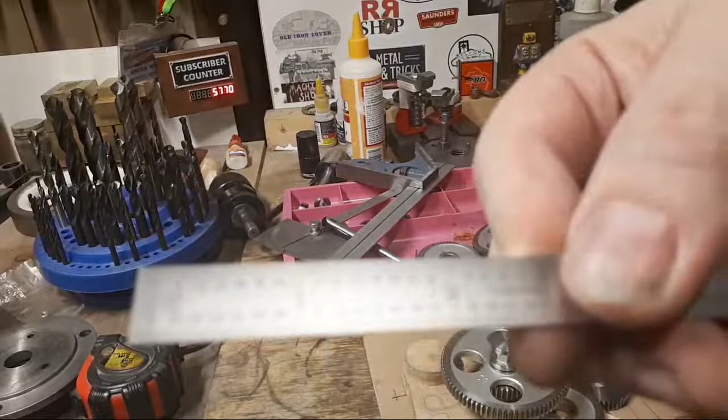We've got this little ruler, it's not much good. It's SPI, don't buy one. It's all right, and Imperial it's okay because it's exactly 6 inches long. You see that, it's fairly easy to read, it's not a bad ruler. It's very, very thin, hasn't got a hole in the end, but it's exactly 6 inches long, which is nice. Metric size though, it's exactly 152.5 millimeters long, which is a real pain because, can you see that?

Hey Ted. Don't know if you can see that or not. Try and get that to focus. Yeah, it's not happening, there is no focus. Anyway, if you use the wrong end, you always got extra 2.5 millimeters. So bit of a trap, that ruler. I use it sometimes, and you can't hang it up, so it always sits on the bench. Anyway.

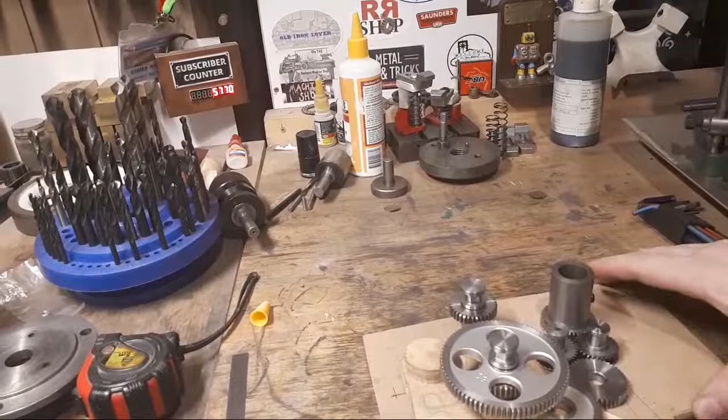Now, oh gosh, we've got bits here everywhere. I'm going to have to shift this tray. Hang on. Tray's going over there, let's push this back so you can actually see it. This crazy mix-up actually looks like...

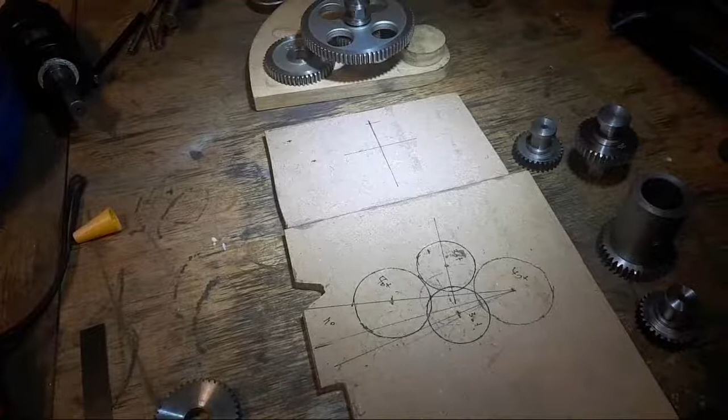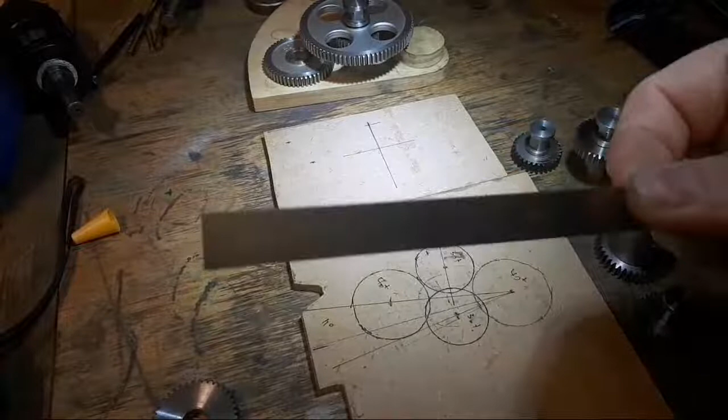G'day, Maddie. Well, I've got probably a dozen good steel rules that hang around, just this one's a bit of a nuisance. It looks like it's probably a good thing for like an apron pocket or something, but apart from that it's a pain. This piece of wood wasn't wide enough, so I put a bit of tape on it and glued two bits together.

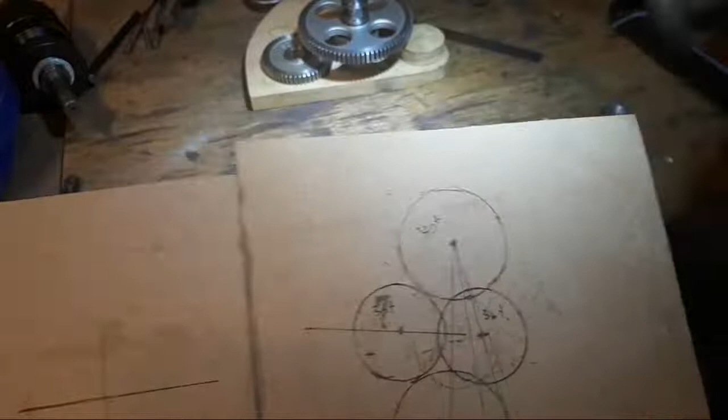But this is a template that I've been putting off for a while. It sits on the bed of the lathe, and I marked the back of the spindle on the centre there. And I've got this gear that goes on the spindle with a grub screw, there's a place for that to go, it's all nice and neat.

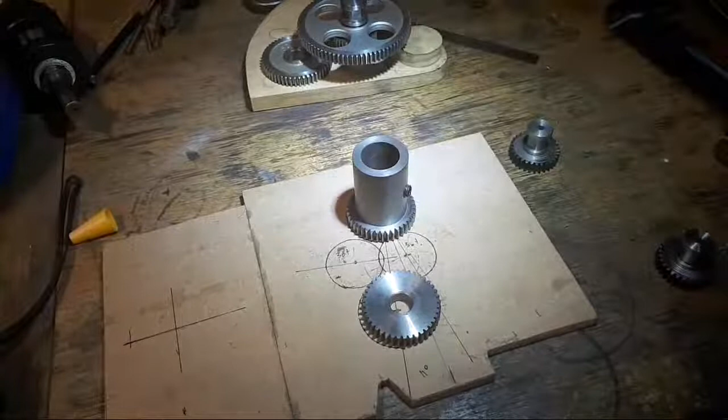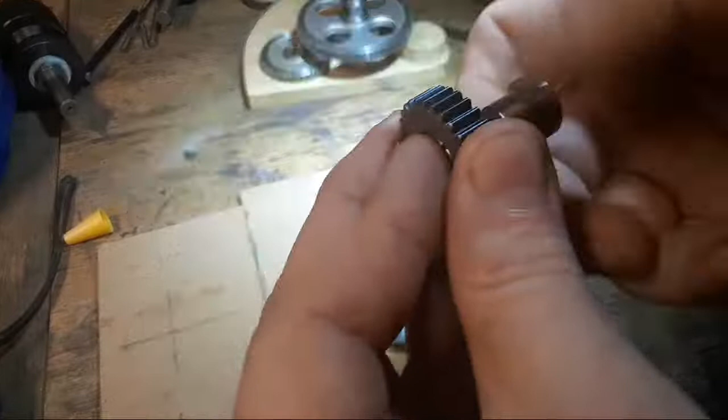Made this one, which is an idler, and this one. Now these two here, this is just a refresher because you've all seen this. These have got flats on them to go in a slot, and they're fussy little pieces, but they're all sort of, it's got a washer and it's got a bronze bush in there and a nice hardened and polished pin.

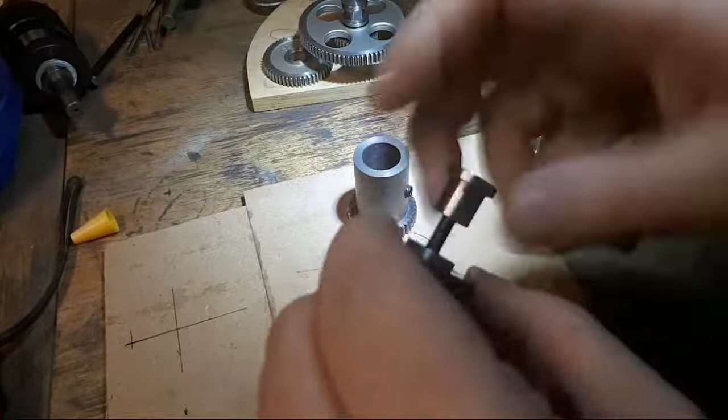That goes on there and that one goes on there. And these go in a slot for backlash adjustment so that you can get them the right depth apart. And I'll put something back together the wrong way around because that one doesn't spin anymore, which is a bit of a mystery. Anyway. They're not actually supposed to. Ah, there we go, we've got the pin. We've got the washer the wrong way around, I think.

There we go. So I've got two of these, which are going to be the tumblers here for the reverse. This is for the thread cutting attachment on the lathe. It's a bit of a job, and I'm nervous about it because...

Making this fit, we've already run into this problem with the steady. Making this fit the bed at the right centre height is a bit of a challenge actually when you haven't got any real point of reference to check it on.

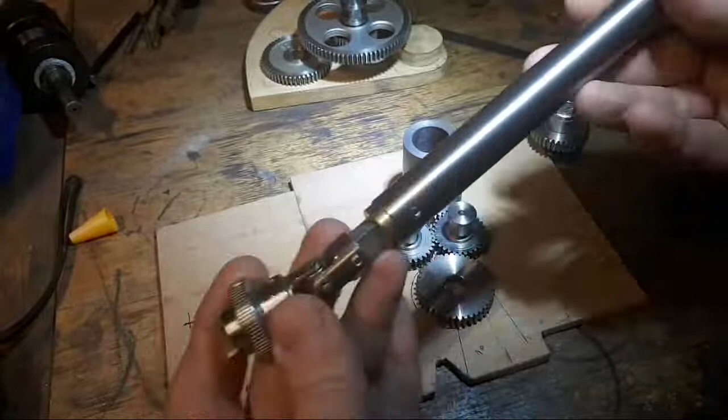Which has this crazy contraption, which is adjustable length, square drive, on here like this, to drive the saddle. The saddle's already been converted and there's a dog clutch and everything, and it's all adjustable and nice, and I'm pretty pleased with all this.

In the middle here, there's going to be a quadrant that looks something like this. Probably not anything like this, actually. I don't know about the triangle thing. It's probably just going to have one slot in it, or maybe two parallel slots. I'm not sure whether we need two, though. I think probably only need one. And that'll be adjustable this way.

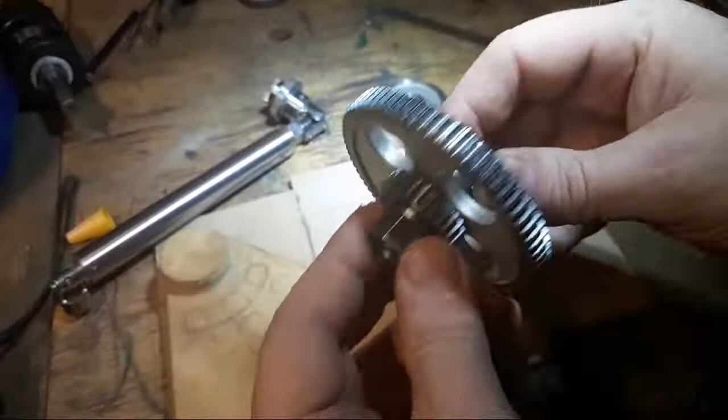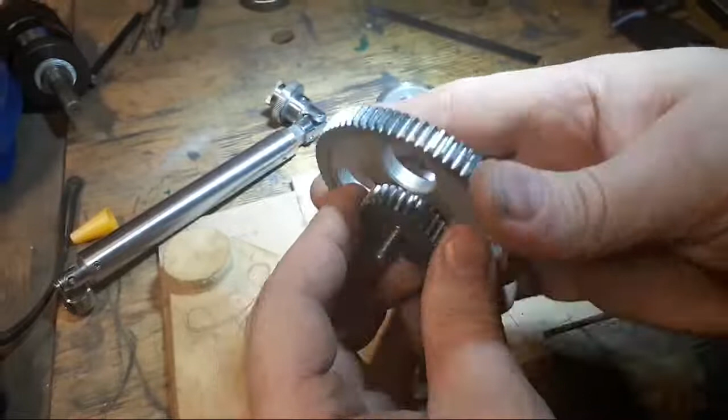And then we've got these assemblies here, which have a lot of bits in actually. They've got a piece there that goes in the slot and locks in, and then this has got a bronze bush with a keyway stuck in it, which goes on there, and that gives us space for two gears or spacers or whatever else. There probably should be a spacer in between there. I did make spacers for it. So I made long spacers so we can put the long spacer on there with the keyway, and just have a single idler. Or we have a short spacer, which just is a packer. It goes on there, and then we can put another key on. That's how it's supposed to go.

And then this fancy nut goes on this side. And we've got, or we should have, oh, there we go. We've got a gear that spins on there on the slot.

I didn't cut these gears, I cut some of these gears. This is a set of gears from just a mini lathe. Why reinvent the wheel? They're steel gears for a Sieg mini lathe, I think. They're not bad gears. And they're all finished and nice.

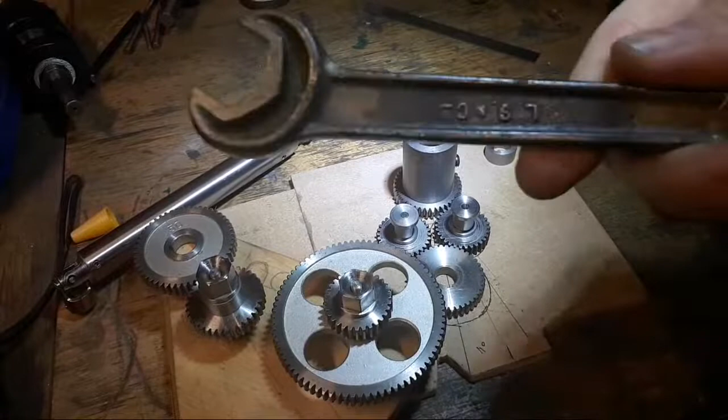Which was kicking around here. Here it is. This one says LS & Co. Lorch Schmidt & Co. That's a Lorch 102, a Lorch 2A genuine spanner.

And this fits here. So that's the idea. And this fits everything on my lathe. Hey Dennis.

Good to see you. So that's what we're working on. Off and on, as the mood sort of treats us.

These three here need to go on a plate, with a big hole and an eccentric bush that actually gives this gear a little bit of movement against this one, so you can adjust the backlash. And then this one's on a slide, so you can slide it backwards and forwards. And you should be able to slide them both backwards and forwards, so we can make a change handle line up on a couple of holes. That's the theory.

Thanks, Rust Knox. I hope so. I'm really not all that confident about that. There is a lot of gears here, and there's a lot more besides. But that's how we are. This one fits the machine.

We've got to make a plate for this that pivots on this end for the tumbler, and then this has got to spin as well inside the tumbler as an idler. And then that's got to have another gear on top of it. There's got to be space for another gear to give you transmission to this one, which is probably going to be another 40 teeth gear, or we can put a smaller one on there probably.

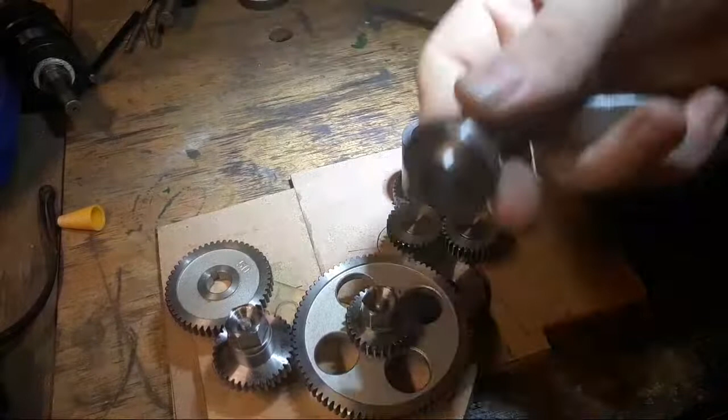This here's got a dog clutch that meshes on the lathe, on the saddle, and it's got a spring detent, so that this pin that goes through here has got two grooves in it, and you can lock it on and off. And all this should have is an adjustable screw here, so that when you're feeding up against something, this pops this out and pops the dog clutch out for power feed stop. That's kind of the theory there.

This is a bit of stainless steel, and these are, I think, just universals off eBay somewhere. I hope they stand up okay.

So whether I'm going to have more than just a screw, and probably a micrometer stop off the side of the saddle or something like that, so that I can adjust this to give us an inch of travel or whatever, or 25 mil or whatever, I don't know. But... that's probably over-engineered.

But now the mill's up and running, I can make a little bit more progress on this. And probably we only need to make this piece to mesh onto fit the saddle, and it's got to have a bush on here or some sort of locking system as well. We've got to work that out before we cut it out.

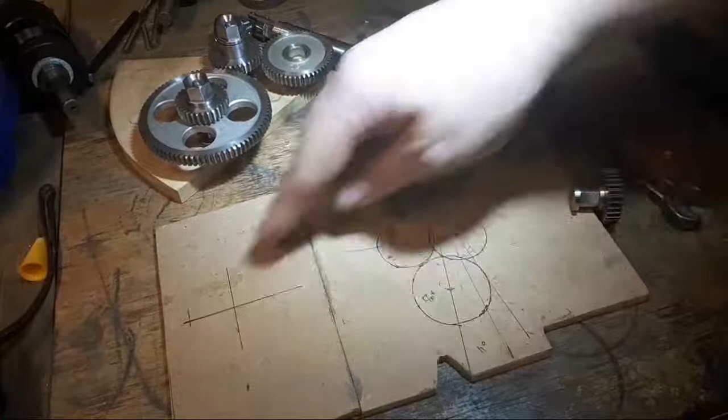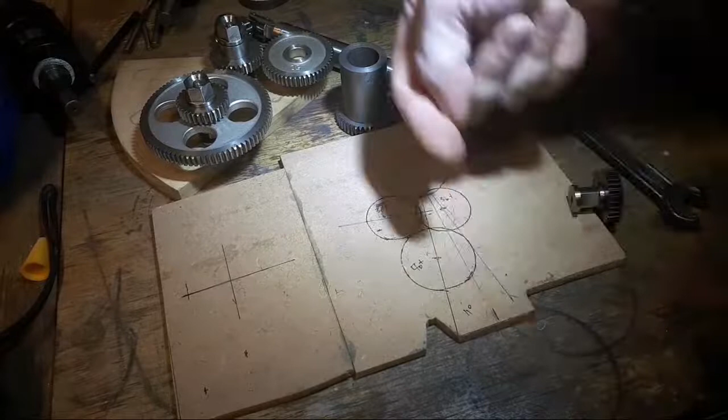And then it's going to fit down here nicely, and it's probably going to be sort of across here somewhere and down here, and that's sort of the shape of it. And then it's got a bolt in the bottom because the lathe's got a little T-slot in the end, so we can use a T-nut and a bolt down through the middle, hopefully, which is why this is offset a little bit.

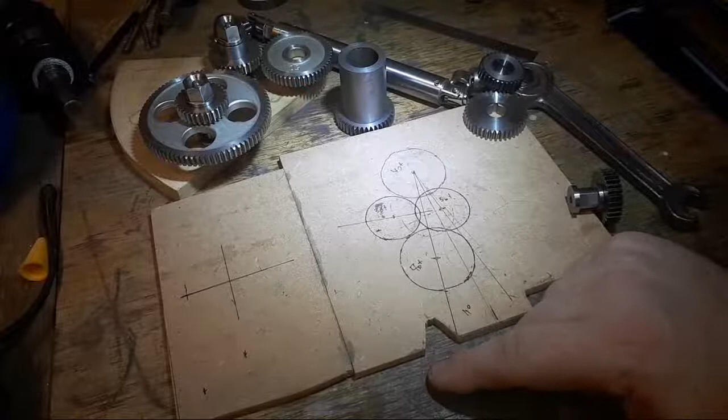I think probably we're going to put a lift dog and then a cam in here this way. I don't know, that's how everything else works on the lathe. And maybe an over-center lever, but I don't know whether it's ever going to come off once it goes on the machine anyway. So all things to think about. And while it looks relatively simple to finish, there's a lot of work in it.

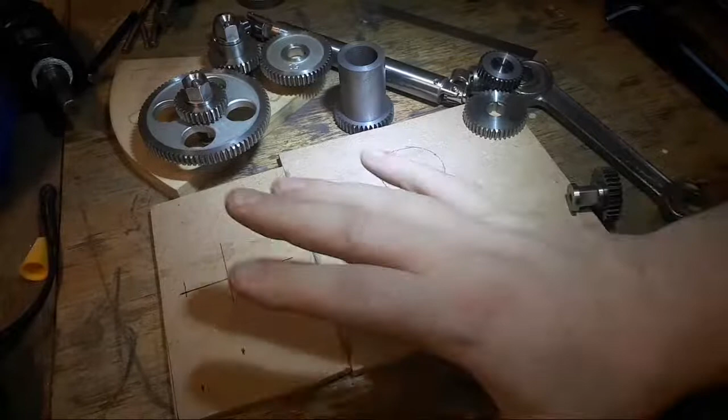So that's where we're at. What else?

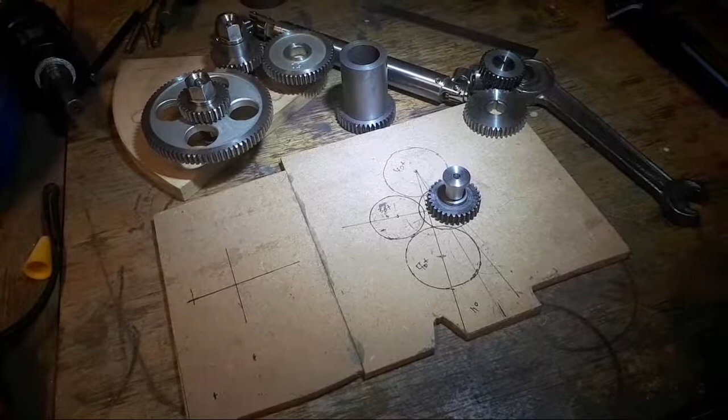The main thing on this quadrant, which is not going to look anything like this, I don't think, is that it doesn't touch on the bed, and it doesn't bang on the bed here, and it's long enough to fit the gear that I want to fit in there. So that's where we're at.

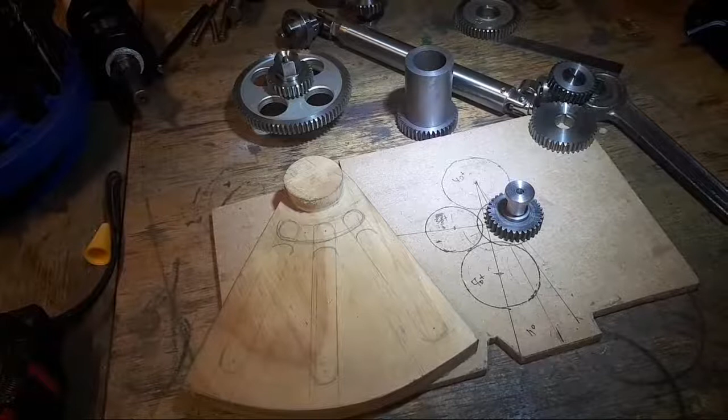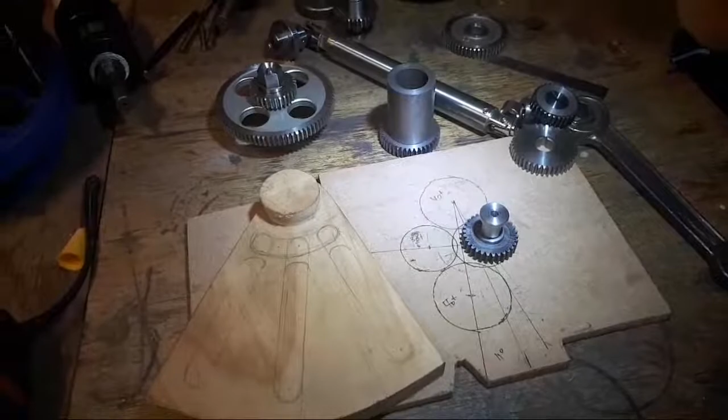We need more space of the flat variety, but anyway, here we are.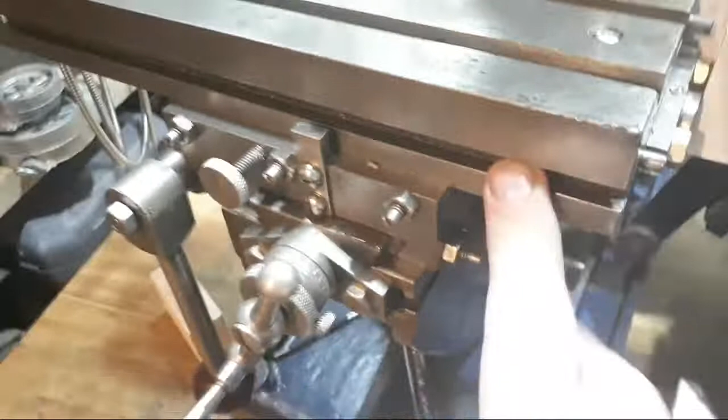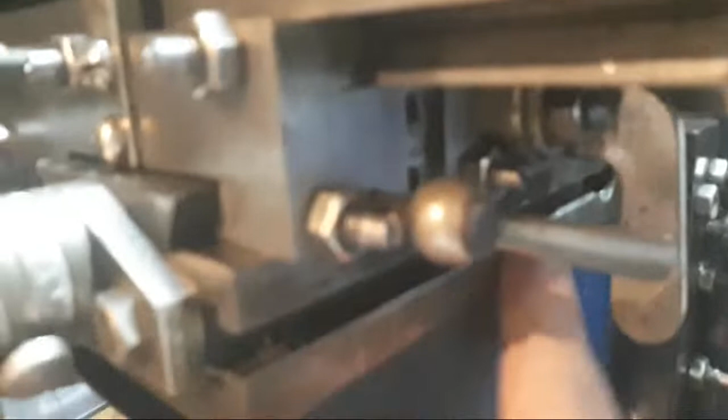Very useful to have it. I don't want to lose, especially with this rapid traverse, the two saddle stops on here, which I'm in the process of making new ones for, for here and under here, because this piece, when I pull it apart, is actually missing. So we're going to make new saddle stops or table stops for here as well, but we're probably going to hang this one down low enough to sit the...

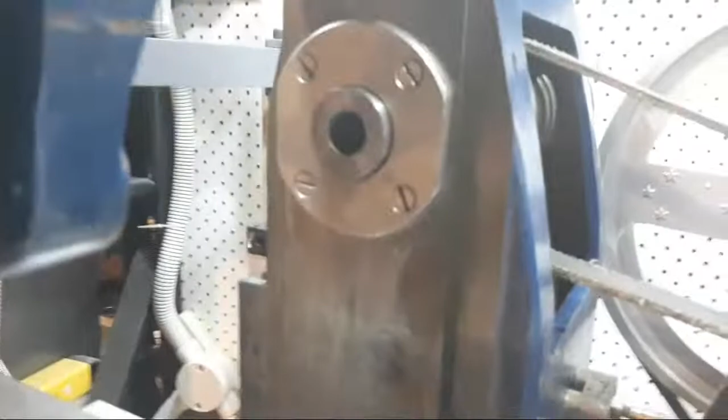To connect the Z-axis DRO back in here. This is the Z-axis because it's a horizontal mill, and the mill axis sticks out there like that. So I'm probably going to bolt or make a block of aluminium, a decent one, in here, and sit the new slide in here and go through there and connect it off here somehow for this axis. But that's the next one.

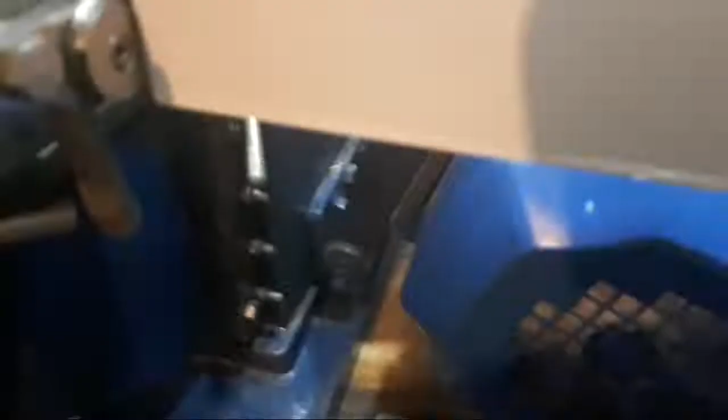So I've bolted this piece of 10 or 12 by 40 aluminium on the back here with two decent big socket head cap screws and a bit of 10 by 20 on the bottom there. And under this cover, wonder where...

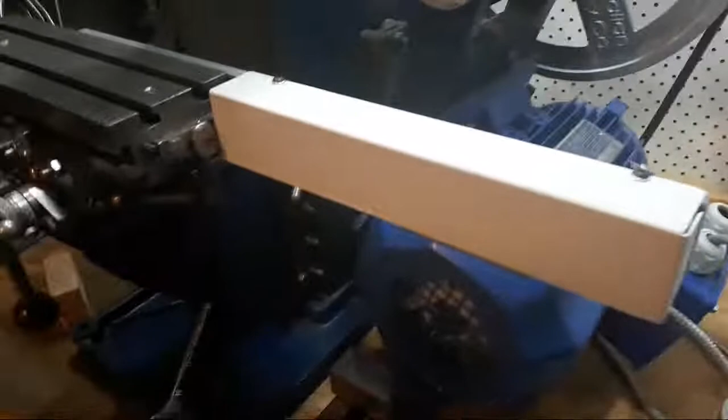I've tightened this up anyway, but this is all nicely finished. I'm pretty pleased with this. This is the cover for it, and if we have a look under there, the glass scales are under there, and that's quite a nice little finish. I'm pretty happy with that. And it works.

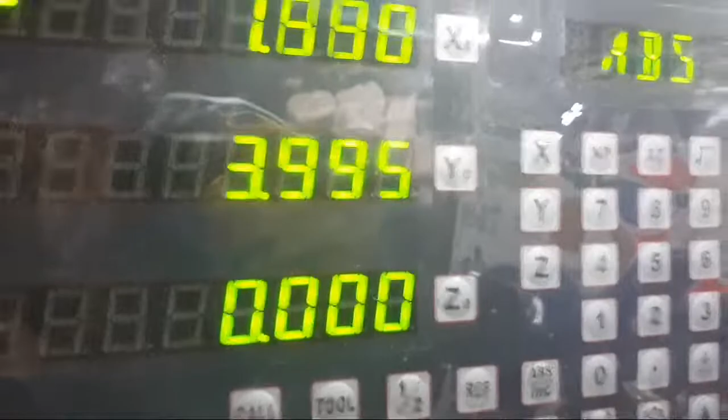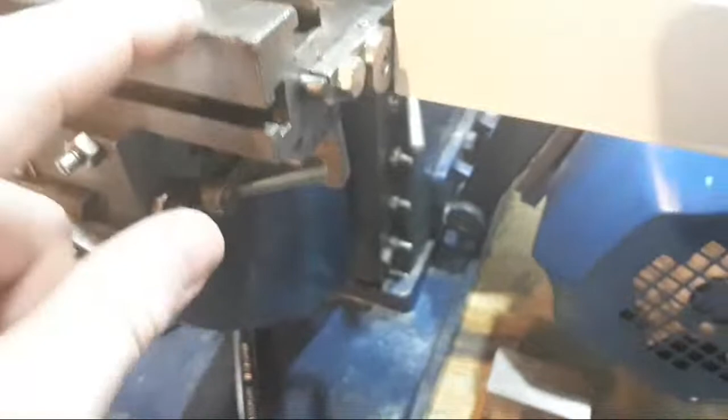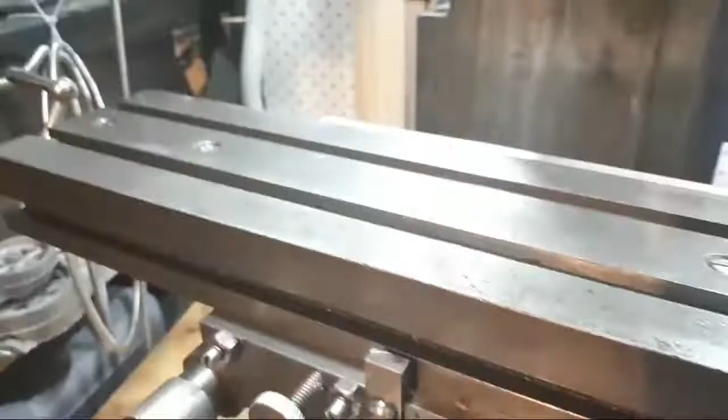So I've been asked several times why I didn't put it on the front, and why I didn't put it underneath. Why didn't I have a set of levers and put it over there on the wall, etc, etc. None of those things seemed to want to work. So this is nice and neat and tidy. This is down below the surface of the table, so if I do need to hang something out the end, that's not going to be an issue.

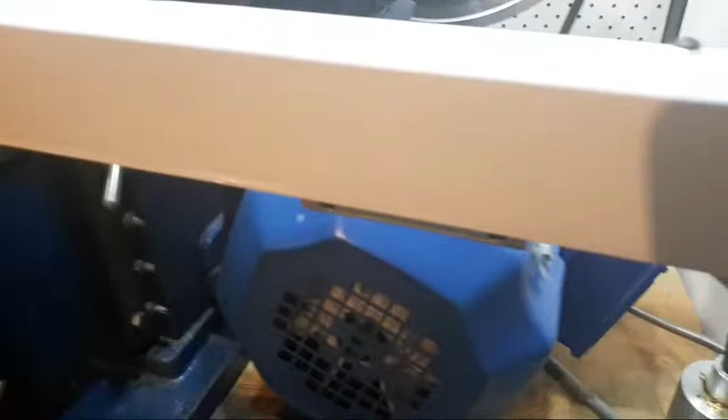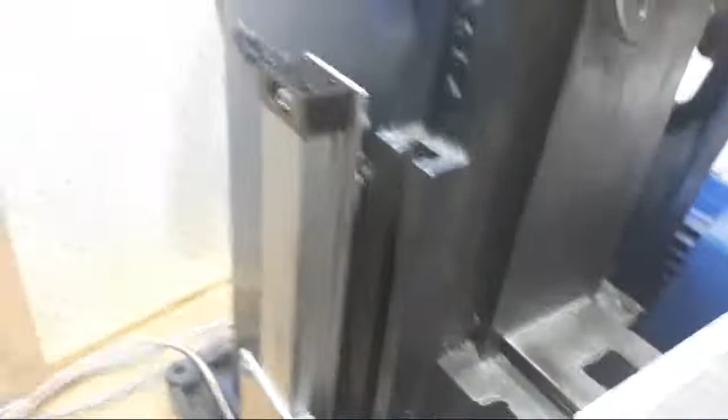And I think that's going to work, and I think it's okay. Ted Roses gave me that idea, so big thanks, Ted, if you remember. Anyway, I might do a video about this, but that one's on, and then there's the other ones there as well. So far we've got 2 axes, which is really good. Magnetic scales would have been good, Mike, but it just didn't happen.

Now we're coming back here because our battery is nearly flat. Hang on, plug back in. I don't know why that's not charging. That's better. Now, so...

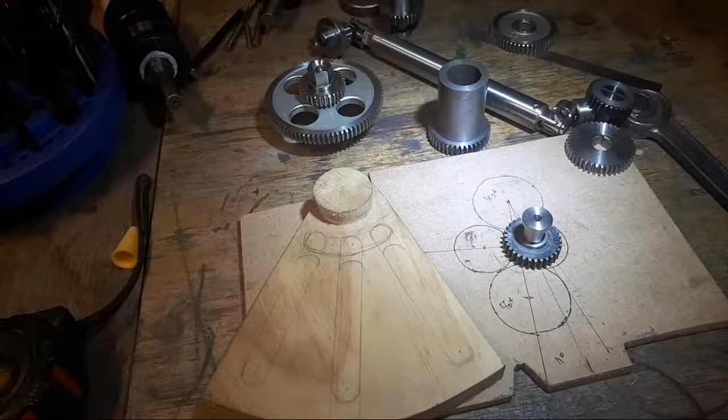There are 2 projects. I've got these made up on a completely different tangent. This is my DRO book, and this isn't a bad book actually. It's quite well written. I hope everyone got a book this good with theirs, because it's pretty good. It's actually got punctuation and stuff in it.

Anyway, we've got a dog next door. It's just discovered that I'm here. I'm going to shut that window. There we go. Anyway, got these made up.

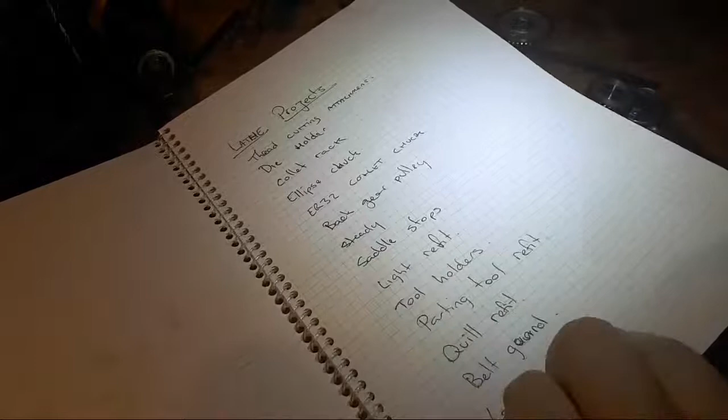Really bit pleased with these. These are excellent, and you've probably seen these in a couple of videos. This is the project to get the lathe up to where I want it to be. Just so you know, they're all individual projects. There's a thread cutting attachment, that's this one.

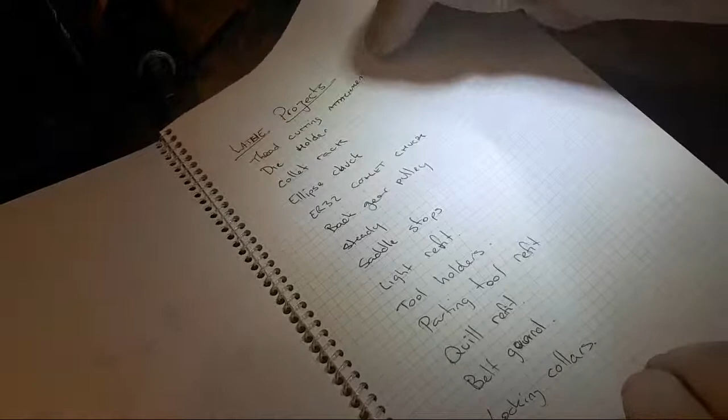But that's crazy, don't ever do that. If you ever get the urge to write down this list, don't. And there's the ones for the mill, which isn't a very big list yet, but I'm only just getting started.

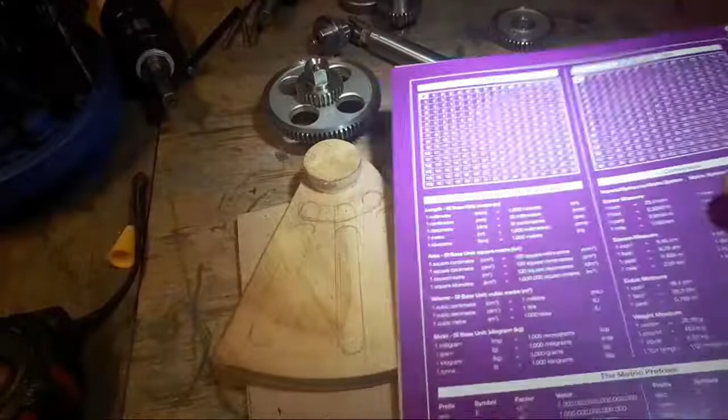Anyway, these are 5mm squares and A4, and they're bound so that you can turn them inside out. And they've got a nice cover with a plastic cover so that the oil and stuff you can wipe off. And they've got charts on the back. This one's seen a bit of use actually. Basic charts and things on the back. They're not particularly exciting or interesting, but that's just how they turned out.

I don't know what I'm going to do with these, but I reckon they're pretty good. A pretty good thing, because this is the plastic cover on here, that's why that's not lining up properly. There we go, so the plastic cover goes on top. And I've got them in a couple of colours, and it says Project Notebook, be kind to each other.

Pretty fun. Now, I've sent some of these out for Christmas presents, and if you get one of these in the next week in the mail, you know what that's about. Use it, have fun with it. That's good. I've got a few extras, so I don't know whether I'm going to sell them or give them away yet, but that's coming on.

Anyway, that's something I've been looking at for a while because I got totally sick of not having a decent sized spiral graph notepad that stayed open on the bench and closed up after use, where you could always find it, and it didn't really matter if the roof drips on it or the oil can falls over on it, stuff like that. So that's pretty good fun.

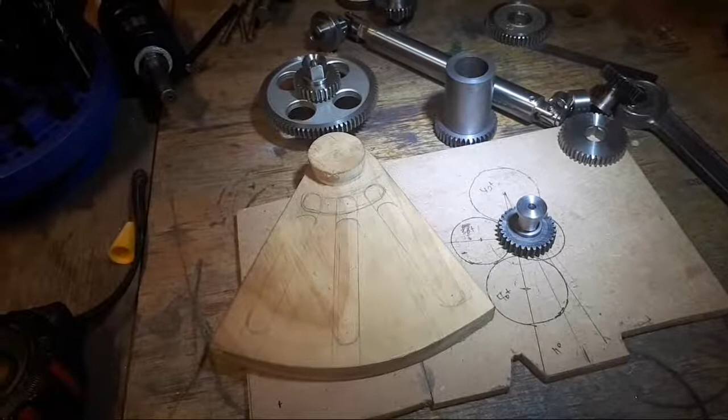And for some reason I have a low battery again. That's charging. And pull that one out, which is actually the subscription counter. So we turned that off for a second. Anyway, that's happening too.

I'm not sure about a brewery tour, but there's lots of things. I know I've got a couple of tours lined up already that are going to be pretty cool. And there will be opportunity to spend some money on secondhand tools, so bring a suitcase - that's taken up a bit of my time at the moment.

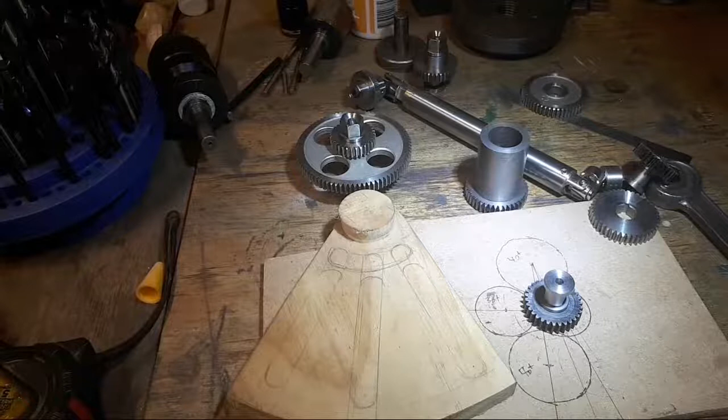What else? I don't know, it's pretty warm. I hope so, Tommy, I hope so. I hope everything works out and everything works. But it won't take a lot to go wrong to mess it up either, and it's a fair bit of work to organise it.

And anyone who wants to put their hand up - one of you young guys from Tasmania, not mentioning anyone - if you wanted to take a bit of a role in organising stuff, I'd really appreciate it. But no pressure. There are people who are experts at this, and there's another creator who puts videos up occasionally in Sydney, who I'm trying to pluck up the courage to ask about it too, but he's probably overcommitted. Anyway, if he's listening, he'll know.

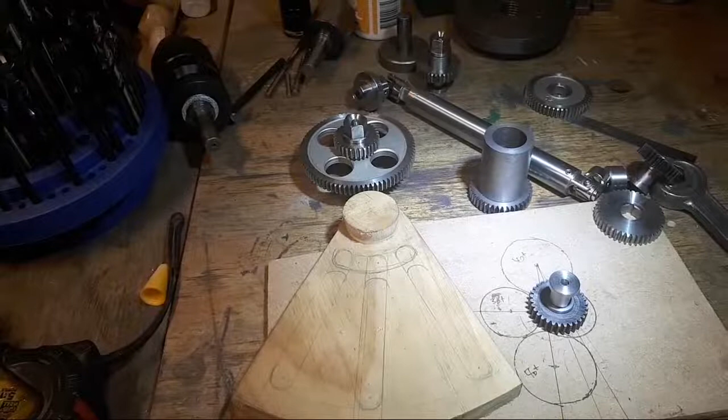Significant birthday - wow, a weekend in Melbourne sounds like a way to celebrate that.

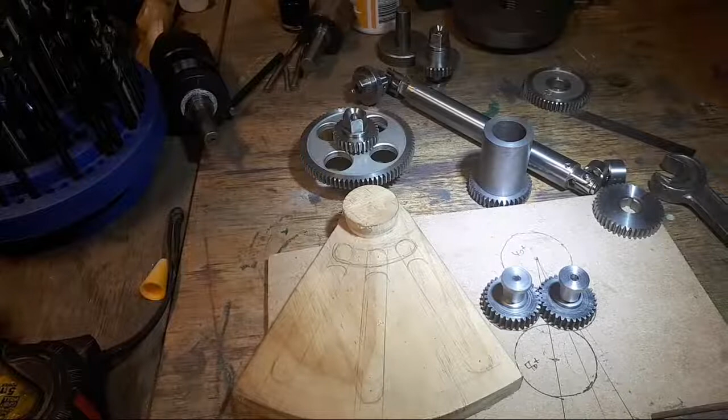I think I'm back, anyway sorry about that. This stupid thing is not charging properly, so I'm going to say we're going to call this a night.